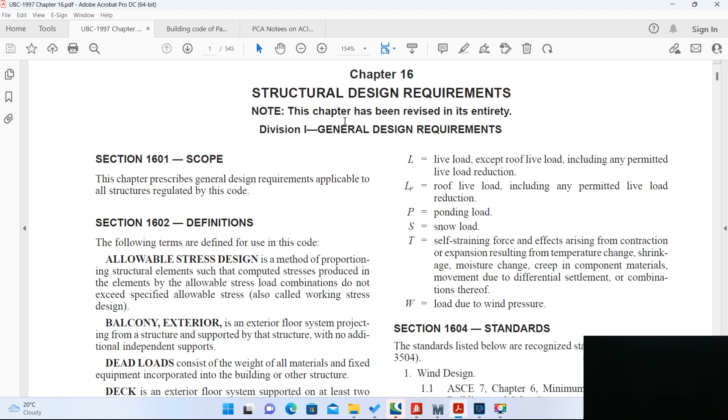Let me show you the Pakistan Building Code. This is the first page of Pakistan Building Code with seismic provisions of 2007. This Pakistan Building Code is totally dependent on UBC-97. That's why I am following the structural design requirements of UBC-97. So all the formulas and conditions, everything is the same over here.

But there is a difference in the Building Code of Pakistan. Basically, it has redefined the various cities in Pakistan with various seismic intensities or seismic zones. For example, I'm living in Islamabad, and as per UBC-97, Islamabad is under seismic zone 4, which is a very severe seismic area. That is very true because the city of Islamabad is at the edge of the lower Himalayan limb, which has experienced earthquakes before, like in 2005 there was a severe earthquake in Kashmir, and because of the Kashmir Valley, there were damages. A multi-story building fell in Islamabad.

After that, people started thinking that this is a serious threat in Pakistan too, and we should develop our own building code. As a result, in 2007 the government of Pakistan approved this Building Code of Pakistan. Although I have some reservations, this building code is totally dependent on UBC-97.

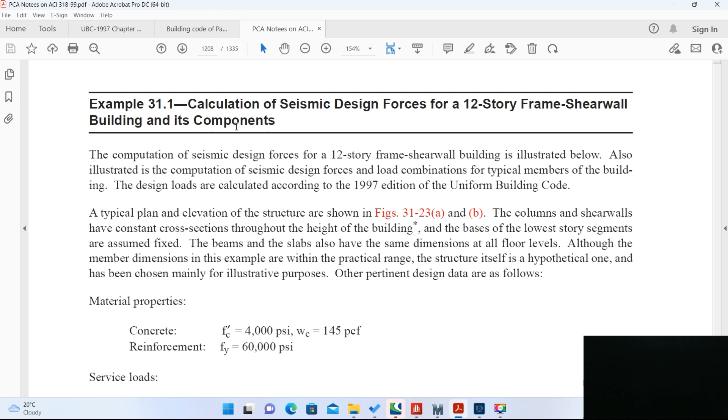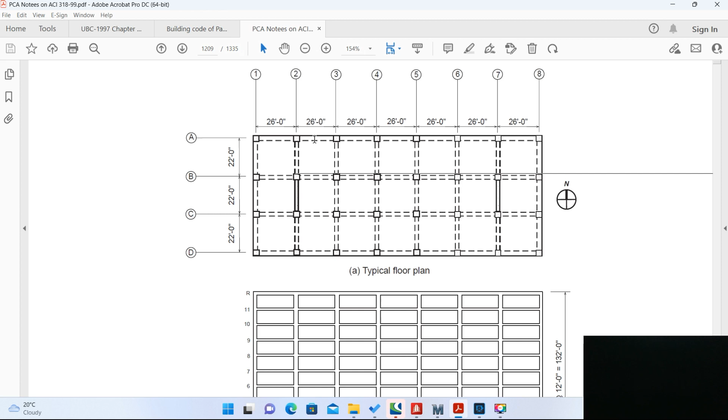I took an example from PCA notes on ACI 318-99, example number 31.1: calculation of seismic design force for a 12-story frame shear wall building and its components. Let me show you the building first. Here is the building plan. It has 7 bays in the horizontal direction and 3 bays in the vertical direction, and it is a 12-story building. The first story height is 16 feet; all other stories are 12 feet high. Various sections: edge columns are 22 by 22 inch, interior columns are 26 by 26 inch, beams are 20 by 24 inch, and there is an 8 inch thick slab. The walls are 18 inch webs plus 32 by 32 inch boundary elements. So all this information is there.

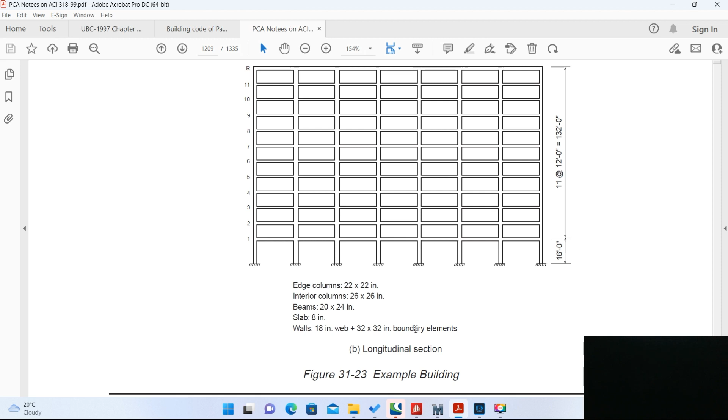I took this example as a reference because the building is designed as per seismic zone 4. Seismic source type is B, soil profile is SB, and importance factor is 1, etc.

As I told you, Islamabad and Karachi, both cities, as per UBC, fall under seismic zone 4. Although the Pakistan Building Code has lowered the severity and considers it seismic zone 2B, in my opinion both cities, especially Karachi and Islamabad, should be in seismic zone 4, and we should be very careful in designing buildings, especially multi-story buildings, in these two cities, considering seismic zone 4 instead of blindly following the Pakistan Building Code, which has lowered the severity for these two cities.

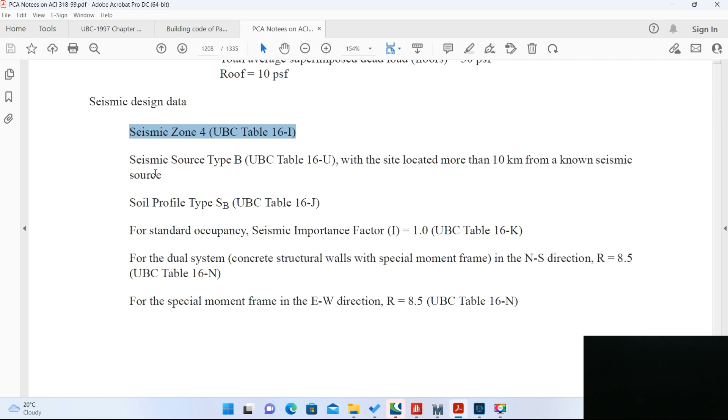In my opinion, I should be following UBC recommendation. If you follow UBC recommendation and take these two cities as seismic zone 4, you are safe, because the code only requires 2B. But if you design as seismic zone 4, you are safe in any case—you are not lowering the severity, and your structure will be safe enough. God forbid if there is any earthquake, your structure will be safe. That's why I took this example, and I'm going to design this with ETABS.

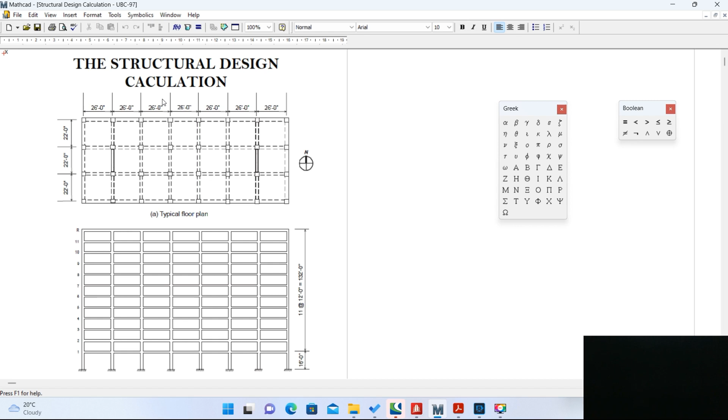But before designing, I prepared a report in MathCAD. So let me share the MathCAD report for the design calculation, or the load calculation. Here is the structural design calculation.

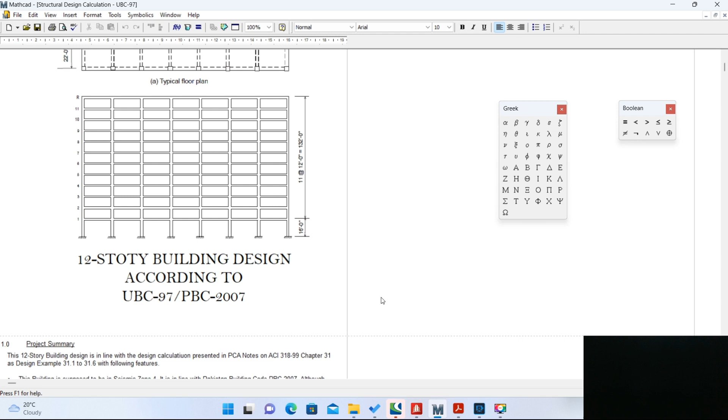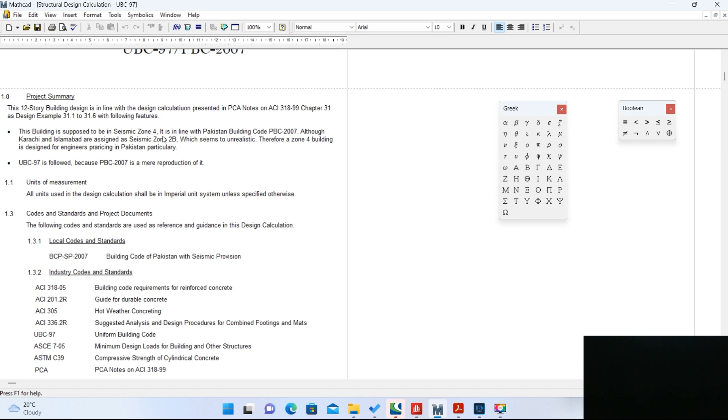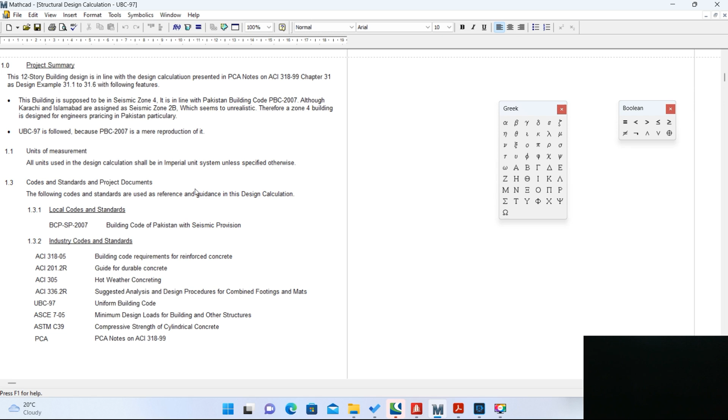I took these figures from PCA notes, and I'm telling you that this is a 12-story building design according to UBC-97 or PBC-2007. Of course, I'm considering this in seismic zone 4 instead of considering seismic zone 2B. As I mentioned before, even though PBC 2007 says it's seismic zone 2B, I'm going to follow seismic zone 4.

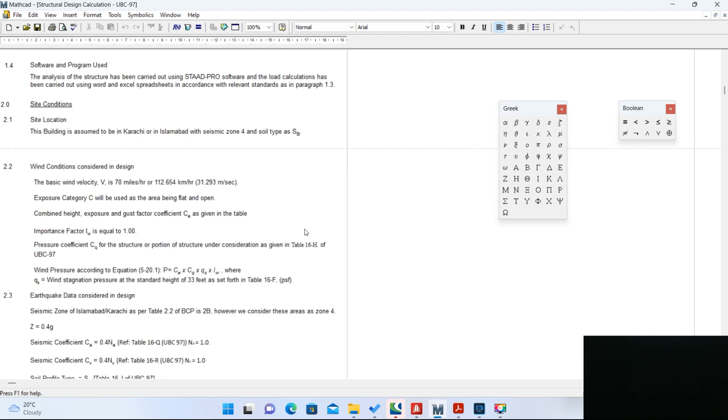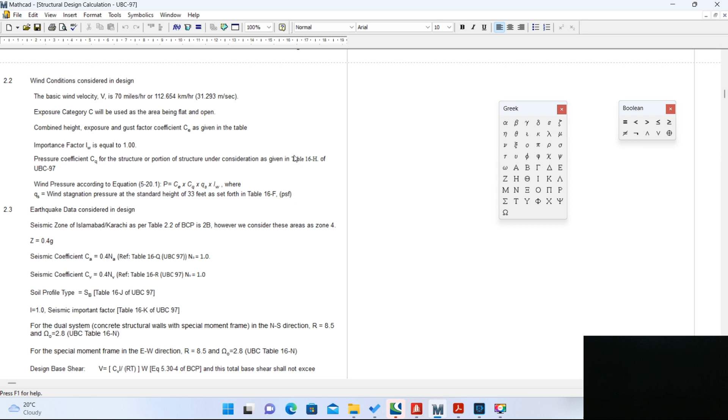Site condition: the building is assumed to be either in Karachi or in Islamabad, with seismic zone 4 and soil type SB. For wind load condition, as per the given conditions, the basic wind velocity is 70 miles per hour, or 112.654 kilometers per hour. Exposure category is C. The CE structure table is given. Importance factor is 1, and the pressure is calculated as per UBC 97 with table 16H.

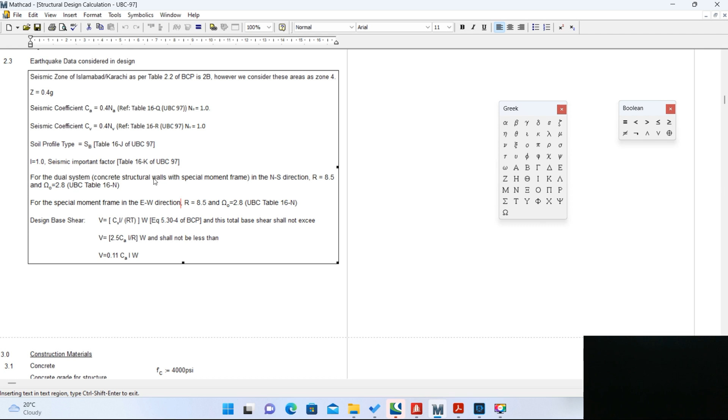Earthquake design data: as I mentioned, seismic zone is 4, so Z will be 0.4G. Seismic coefficient Ca will be 0.4 Na, where Na is 1. Cv will be 0.4 Nv, where Nv equals 1. Soil type is SB, importance factor I equals 1. The R value and omega values are 8.5 and 2.8, and in the north-south direction and east-west direction, both conditions are the same. So I compiled all these values over here.

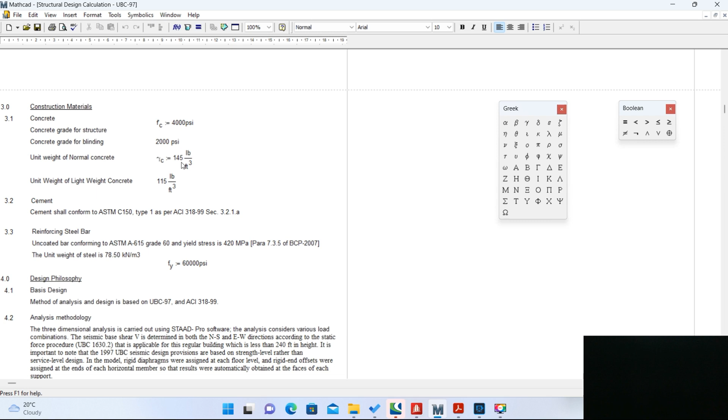Going further down, the material considered: F'c is 4000 psi. The density of concrete is considered as 145 instead of 150 pounds per cubic foot. Fy equals 60,000 psi, which is acceptable both by the Pakistan Building Code and UBC 97.

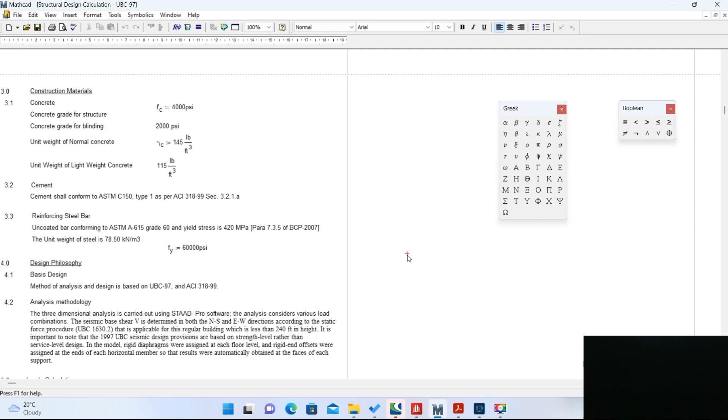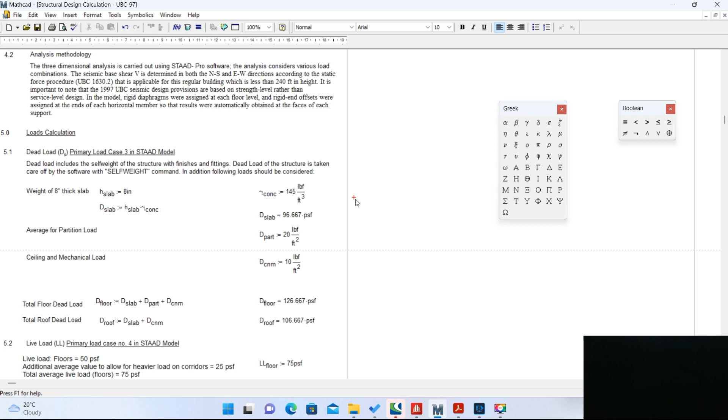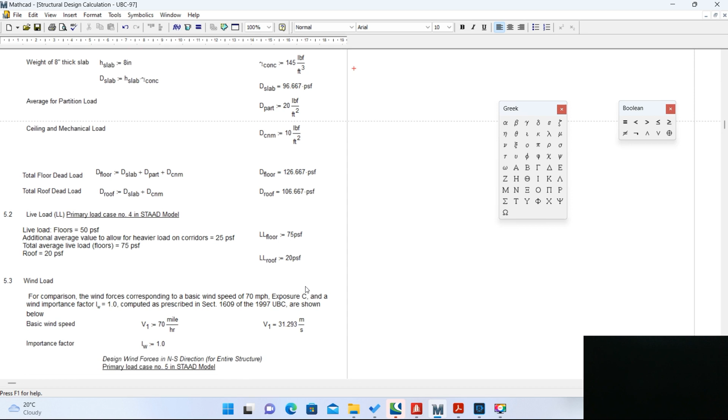Let me go down for load calculation. For dead load, I have considered an 8-inch thick slab as mentioned. So the dead load comes out to be, for the floor, 126.667 pounds per square foot, and for the roof, 106.667 pounds per square foot. Live load as per the given conditions: for the floor it is 75 pounds per square foot, and for the roof it is 20 pounds per square foot.

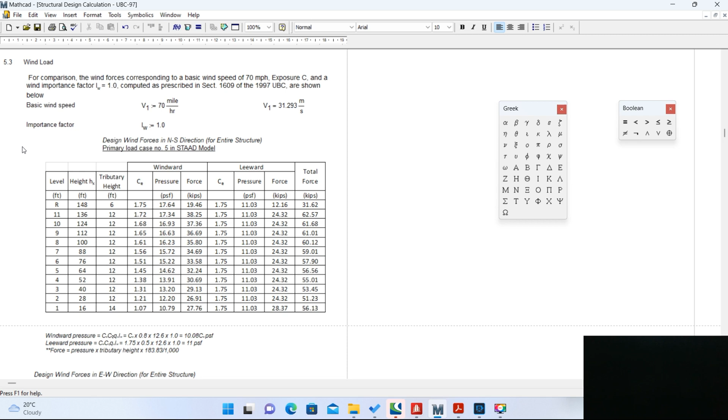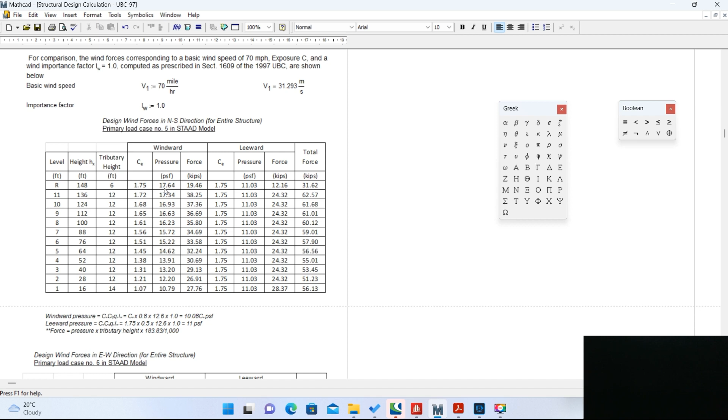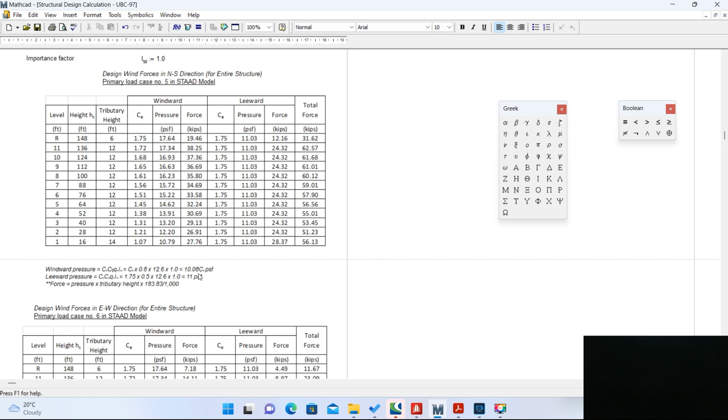Wind load I have calculated as per UBC. The velocity is 70 miles per hour, importance factor is 1. I tabulated the height, the levels and the height, its tributary height, the value of CE from the table, the pressure calculated, and the force. All the wind forces in windward direction and leeward direction are calculated manually here. Basically, the formula is that the wind pressure equals Ce into Cq into qs into I. Similarly, this was for the north-south direction, and for the east-west direction I calculated the wind force in the same manner.

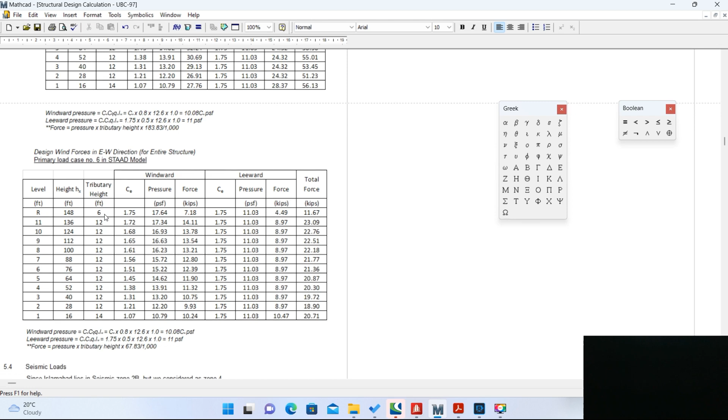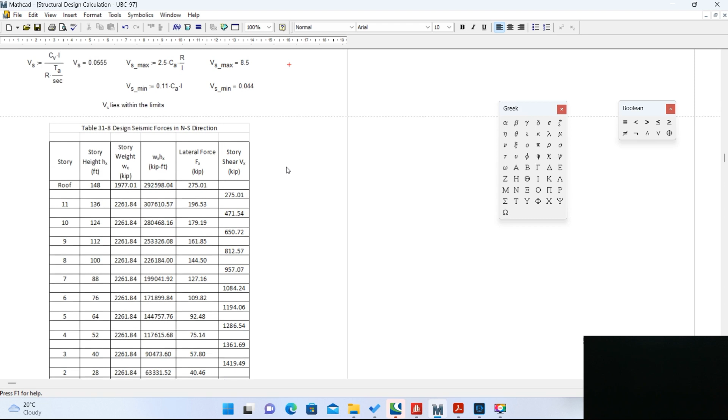Then I considered the seismic load and calculated it. The height of the building is 148 feet. CT is 0.02, X is 0.75 in the north-south direction. The fundamental period comes out to be 0.894, and the coefficient for base shear, Vs, comes out to be 0.0555, which is within the limits. So this is the value of Vs. And in the north-south direction, I manually calculated the story height, story weight, and distributed the load along the height, so the total base shear comes out to be 1481.98 kips.

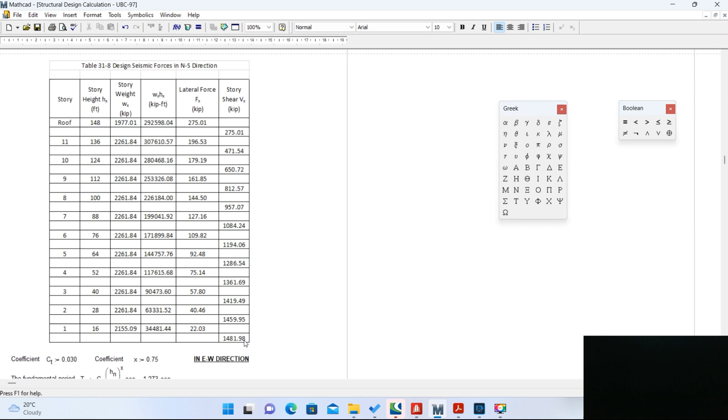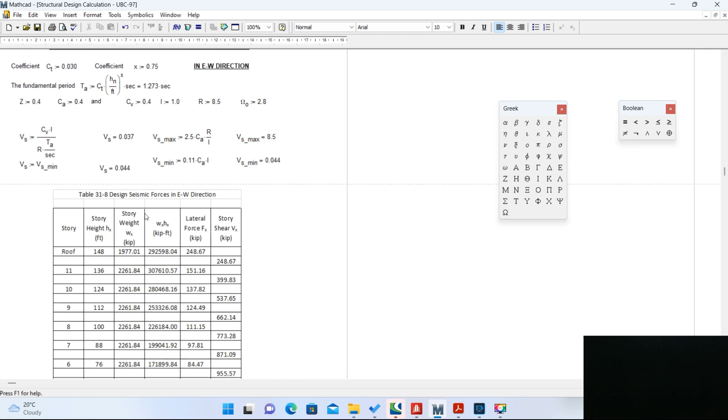Similarly, in the east-west direction, I did the same thing. I calculated the fundamental period, which is 1.273 seconds, and based on that, the value of Vs comes out to be 0.044, because it's actually less than that, so we have to consider 0.044. In the same way, I calculated the story shear at all levels, and finally the base shear comes out to be 1177.02 kips.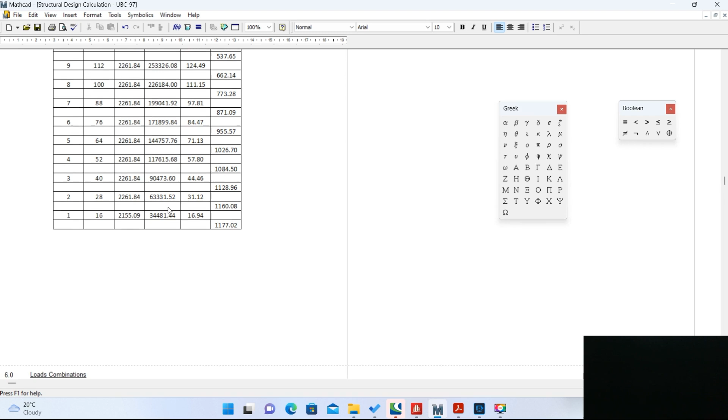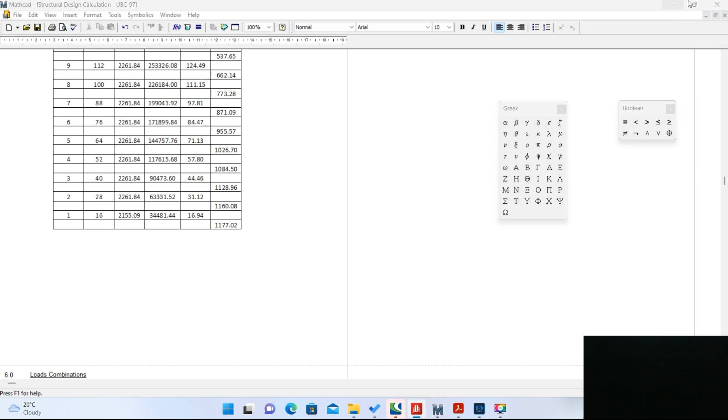Let me go to the model. What I did here, this is my STAAD model. You can see the geometry is there, the properties of course.

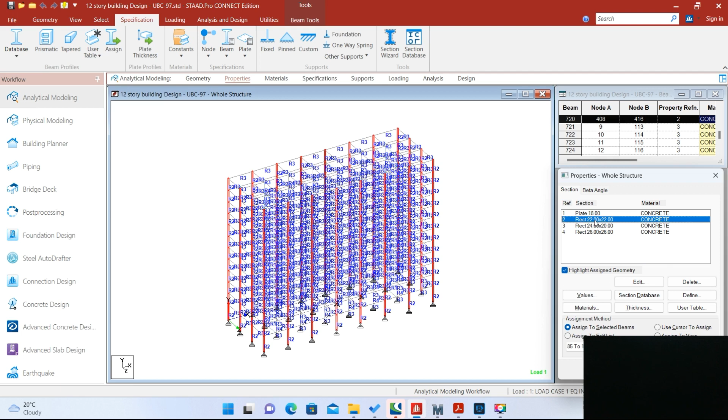These shear walls are 18-inch thick. All the columns at the periphery are 22-inch by 22-inch. Beams are 20-inch by 24-inch, and the inner columns are 26-inch by 26-inch.

And the important thing is the loading. What I did, I defined the seismic load in the seismic load generator, and all the parameters are given over here. Self weight is given, and the floor weight is also given as per the calculation over there.

Then when I go to the load cases, I define all the load cases. Load case number 1 is the earthquake in east-west direction. Load case number 2, earthquake in north-south direction. Load case 3 is the dead load. Load case 4 is the live load. The loads are already defined.

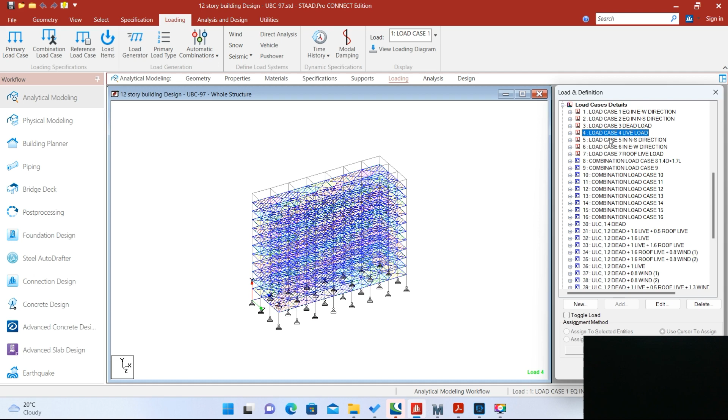Load case number 5 is the wind in north-south direction. Load case number 6 is the wind in east-west direction. Load 7 is the roof live load, which is over here. And then the important thing is the load combinations, which are calculated and assigned over here.

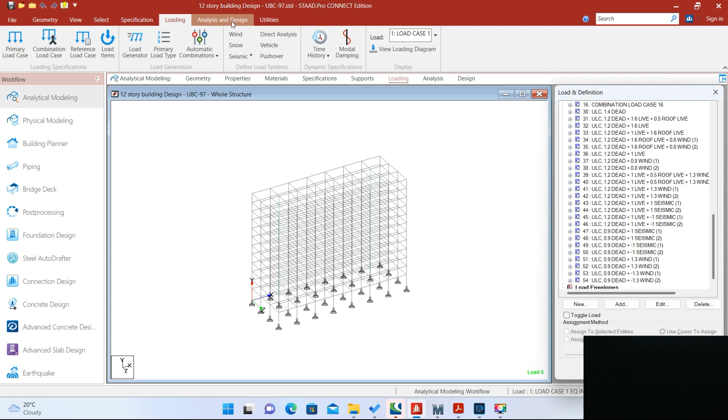Now I run this model and let me show you the important factor. When I got the result, that is what I wanted to share with you. You can see the UBC factor V, that is the base shear as per UBC-97.

In the north-south direction, the coefficient is 0.0554, whereas in my manual calculation it was 0.0555. So it does not make any difference, but here the weight of the structure comes out to be slightly more than whatever I calculated. In the east-west direction, the coefficient is exactly the same, 0.044, and the weight again is slightly higher than whatever is calculated manually.

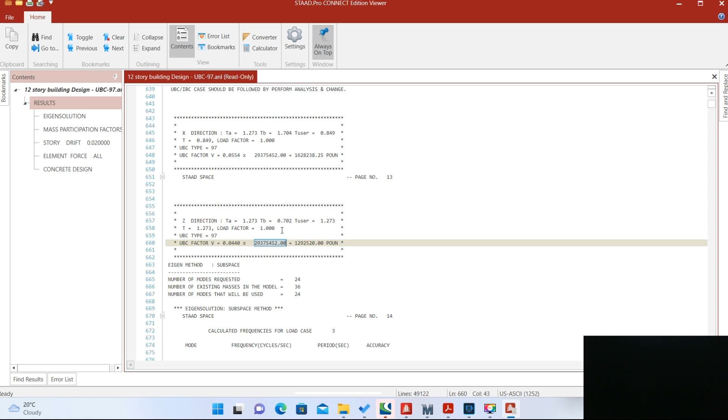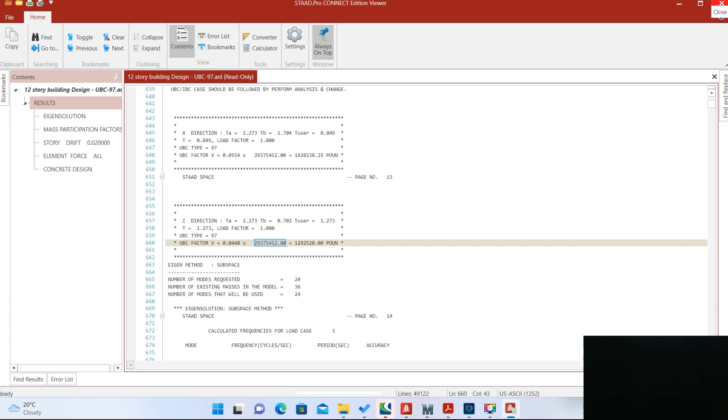That means we can safely use the load generator of STAAD for UBC according to UBC-97. But be careful of one thing: you have to calculate the period first and assign the time period in your definition of the seismic load. Then you will get the proper coefficient for the base shear and the correct result.

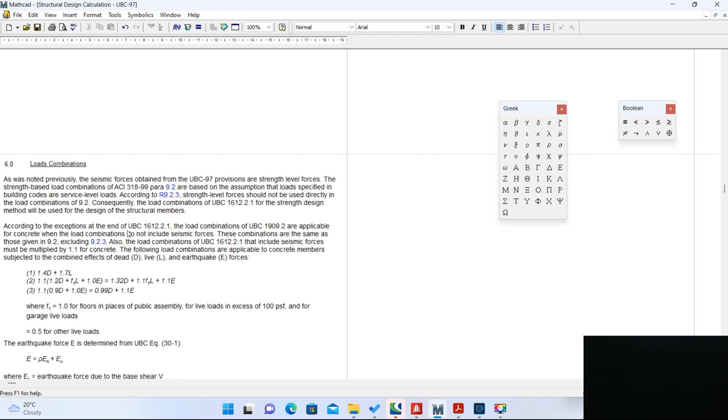Now, load combination is a very important factor over here. As I mentioned, UBC-97 gives load combinations like this: 1.4D plus 1.7L, then 1.1 into 1.2D plus F1 into L plus 1.0E, which should be equal to 1.32D plus 1.1 F1L plus 1.1E, and 1.1 into 0.9D plus 1E, which is 0.99D plus 1.1E.

F1 is equal to 1 for floors in places of public assembly, for live loads in excess of 100 pounds per square foot, and for garage live load. Otherwise, for other loads it is 0.5. The earthquake force E is determined from UBC equation 30-1, which is E equals rho times EH plus EV.

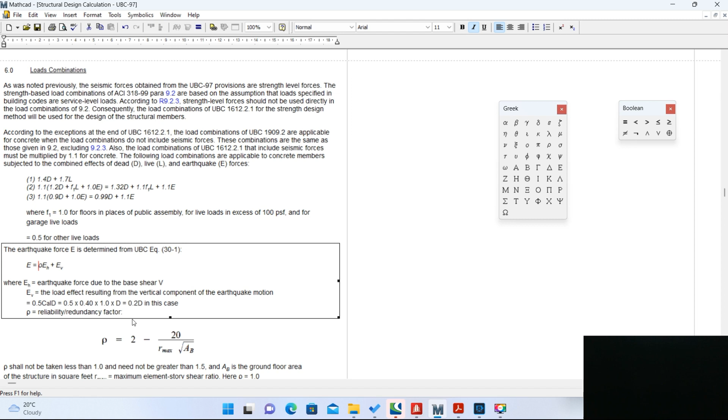This load combination is very important. This definition of earthquake load is very important. Rho is a factor; you can safely take rho as 1, not an issue. Otherwise there is a formula to calculate the exact value of rho, but most of the time the value of rho is safely 1, because it cannot be less than 1 and should not be greater than 1.5. So most of the time the value comes out to be 1. So I took the value of rho as 1.

So the effect of earthquake E should equal the effect of the horizontal earthquake component plus the vertical component. This vertical component is very important, because the vertical component should be 0.5 Ca into I into D, which comes out to be 0.2D. That means 20% of the dead load should be used as a vertical load in case of an earthquake.

Now this 20% of the dead load may increase the weight of the structure if the motion is downward, or it can reduce the weight of the structure by 20% if the structure is moving upward. So you have to consider plus and minus both. Only then can you find the correct result.

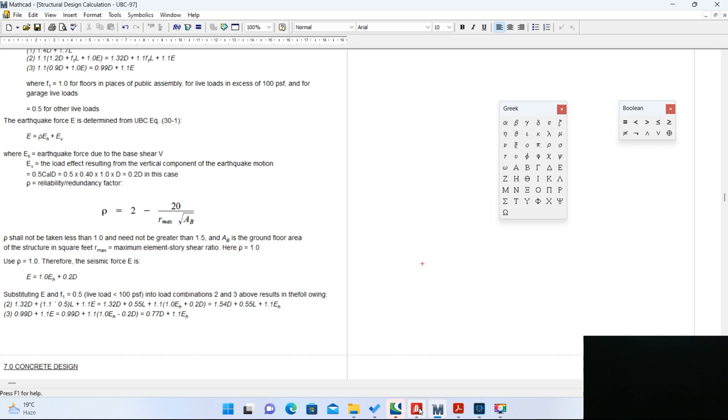Now let me show you the input data file.

Now, here, before designing, I activated the load cases from 8 to 16 only. All the other load combinations I ignored. So here, the load combination, from here, as per the calculation, I have defined the load combinations manually.

Although I generated automatically, the automatically generated load combination is different than this one. That is what I wanted to show you guys: if you are following UBC 97, do not generate the load combination blindly, because the generated load combinations are not exactly the same as what we have calculated. So that's why I manually input the load combinations as per my final calculation. Although I generated the load combinations, these factors are totally different. So instead of taking the generated load combination, be careful and use the load combination as per your calculation.

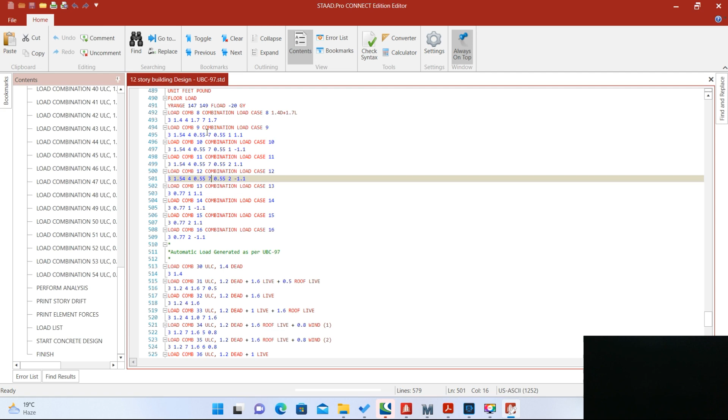So this was a very important factor which I wanted to discuss with you guys. Now, having all these definitions - defining the load cases, defining the load combinations - you can run the model, and then you should design this building as per ACI 318, not 99. Be careful, I'm telling you again. Whatever I have done, I designed this building as per ACI 318-11, so that the load combinations which I have defined by default, the earthquake load is ultimate load, and all my load combinations are correct.

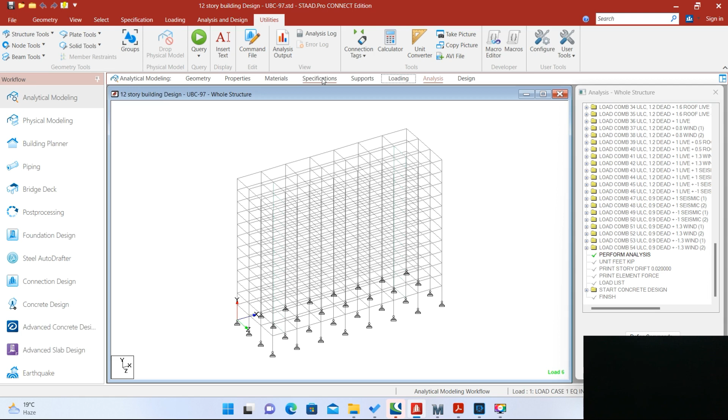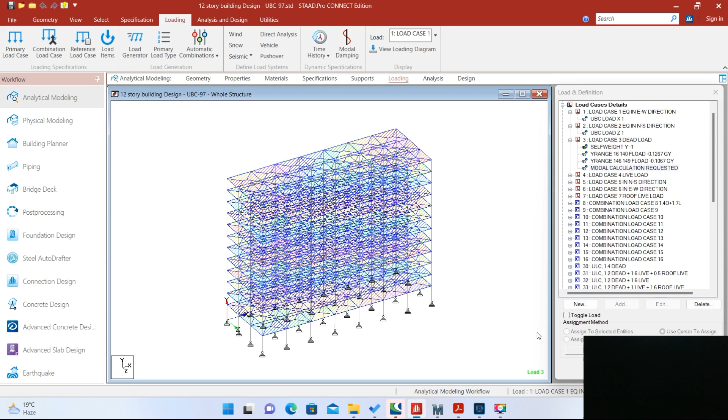One more factor in the modeling: if you see my load case number 3, at the end I asked for modal calculation requested. Why did I insert this command? Why was I interested in modal calculation? Because I was interested in mode shapes, the mode shapes given in the PCA notes, where it is mentioned that the floors are considered as rigid frames, rigid planes, or rigid diaphragms. So to simulate that, you have to define the master and slave nodes. For each and every floor or slab, you have to define a master and slave node. What will be the effect?

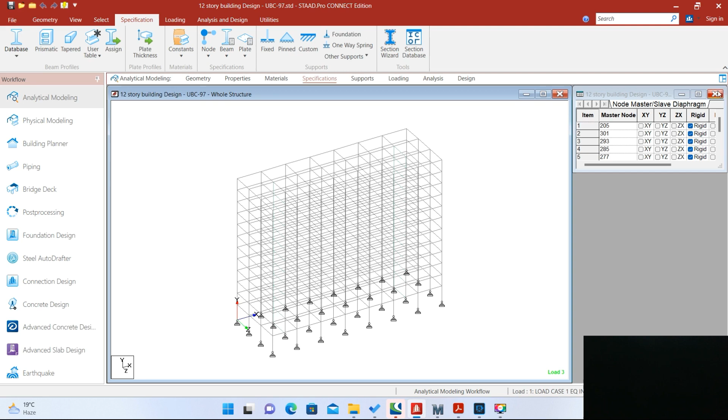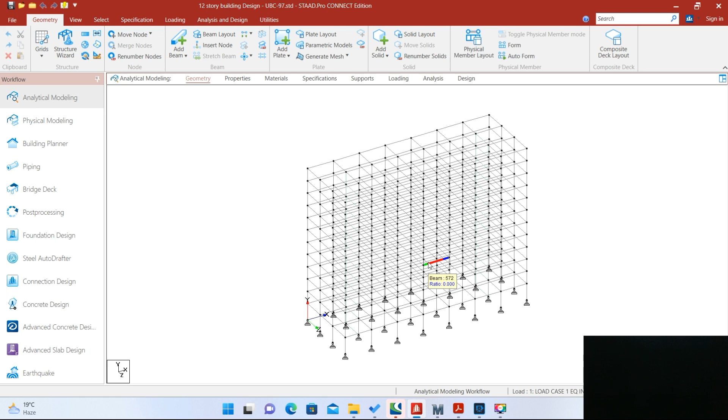The effect will be that all your modes will be exactly the same or similar to the modes calculated by others - rather, this should be the realistic way where the slabs behave as a rigid frame. If you do not do that, you will get misleading frequency information. So that is also very important. Well, let me show you a few modes.

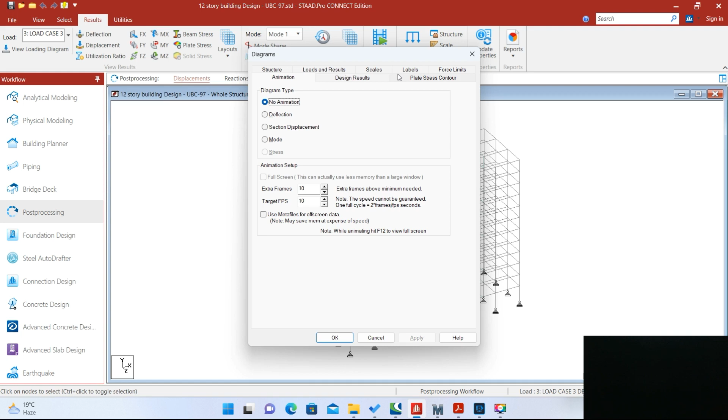Now this is mode number one. You can see the building vibrates as expected. This is the fundamental mode. If I had not defined the master and slave joints, the result would be totally different. So be careful, guys: if you are going to calculate the mode shapes, or if you are going to define the seismic load, then this point is very important - you should define the slab as a rigid diaphragm. With this definition, you will get the proper mode shapes and proper frequency.

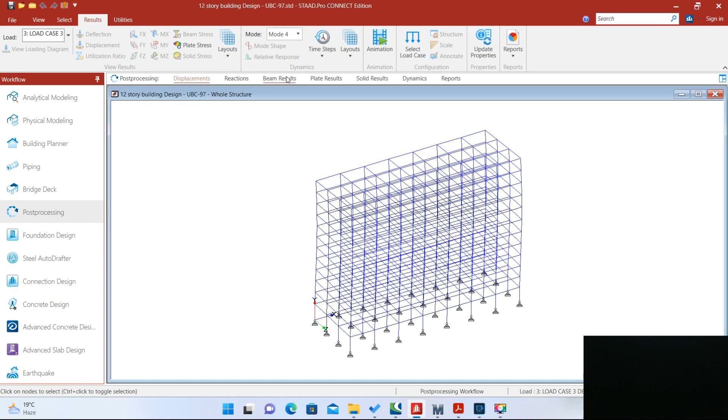Let me show you the second mode. See this second mode? Let me show you the third mode. This is the third mode. Fourth mode - now this fourth mode, I can say, is not the fundamental, rather this is the next frequency or next mode shape in, sorry, north-south direction. You will get proper mode shapes. I'll show you another one. So this is in the vertical direction.

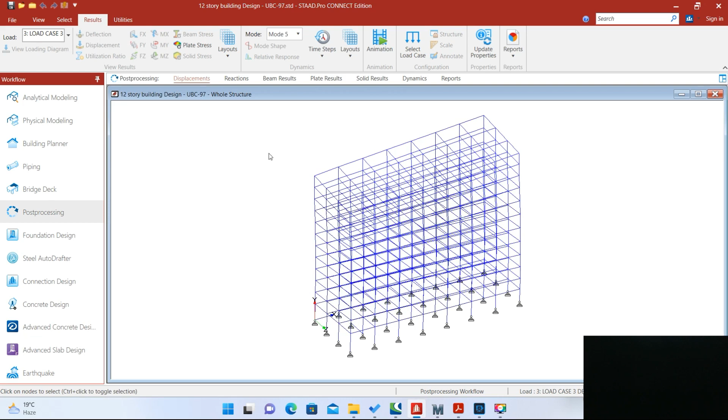Anyway, the point is, let me conclude my video now. If you are going to design a structure against seismic load, especially if you are designing in Pakistan, please be careful: define the loads as per UBC 97, but be careful whenever you are designing the concrete structure. Do not follow ACI 318-99. Follow the later ones like ACI 318-11, which is safe.

Second thing is load combination - you have to be very careful in load combination, following the UBC 97 load combination. Only then your result will be okay. Then the third thing is, in defining the structure, do not forget to define the master and slave nodes for the rigid diaphragms. So if you consider all this information in your design, hopefully you will get a much better result, and you will be very confident.

Let me conclude my lecture over here. Maybe in the next lecture I will show you how STAAD has defined the beams, columns and slabs, or how I have defined them, and how the beams are designed in the PCA notes. That should be covered in a different lecture. So for the time being, I'm going to conclude my lecture now.